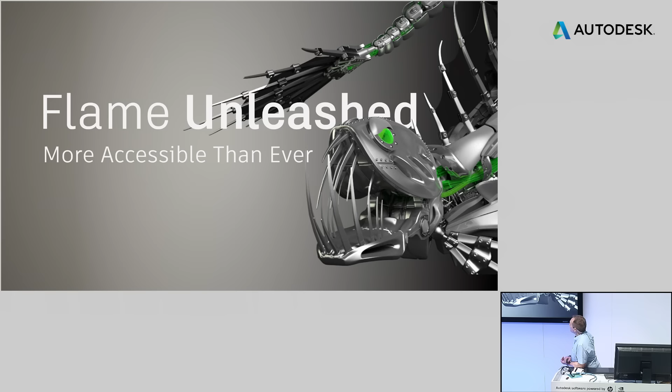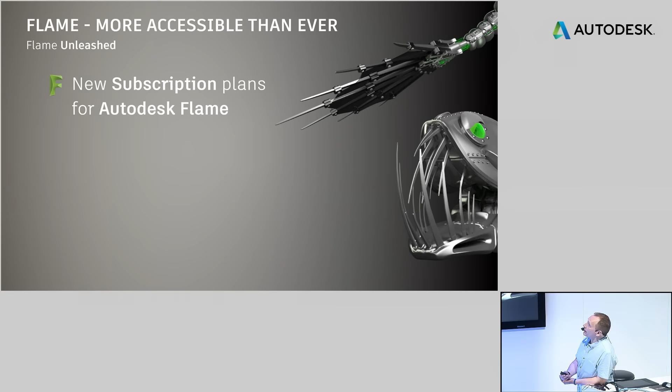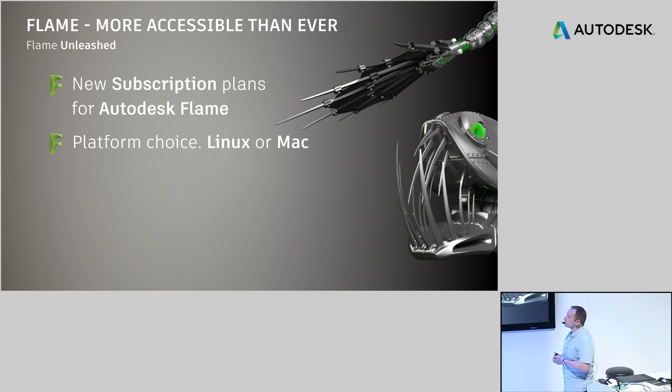First, I think we should talk about Flame Unleashed and what that actually means for accessibility. Last year, around October, we made a drastic change to the way that we sell and provide you with our software. The reason for this was we just want to make it more accessible for people to get their hands on it. This covers the entire Flame family - Flame, Assist, Flare, and Lustre. Essentially what we're doing is giving you different options on how to obtain this more readily, more freely. So new subscription plans for all of our Flame products, and platform choice - you can run the entire Flame family on either a Linux or a Mac platform, which is really good. Flare and Flame Assist for everyone.

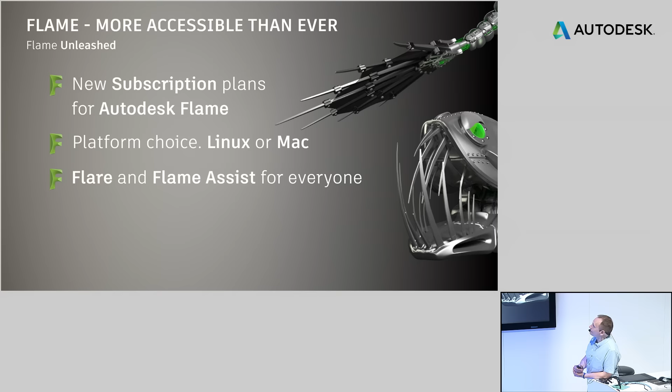What that means is, remember before the change, we were selling Flame on a hardware system, and you had to have a Flame to get access to these other two great bits of software. We're just unlocking that now - anybody can get any piece of software regardless of what they own. The entire Flame family is now available as software only, and that's quite an important thing.

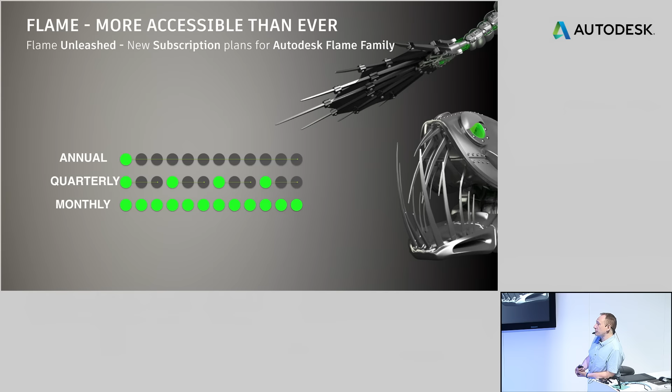Let's start with the subscription plans. We've got annual, of course, and we've got quarterly and monthly, giving people more options as to how they want to potentially deploy the software, scaling up and down as projects grow. You're always going to get facilities that want a Flame permanently, but there are times when you have to grow or shrink depending on the projects you get in, and the quarterly and monthly plans just give you a bit more flexibility. It's also really good for freelancers to get their hands on those products, do a particular job, and keep their costs really low.

And once again, the choice of a Linux or Mac platform - this really depends on how your facility is set up. Big established facilities are probably going to favor Linux; it's more extensible and flexible in a pipeline for people to do stuff with. But for accessibility, we want people to be able to get hold of the software, and the Mac is a great choice - just go into an Apple store, grab a Mac, run your software. It's not about preferring one over the other; a lot of our customers have large pipelines, and the Linux platform is very scalable and pipelinable. But there's also portability - people take these on set, or work from home, or rock into town one day, bring their system with them, do some work or pick up work for a client, then go home again. It's really good.

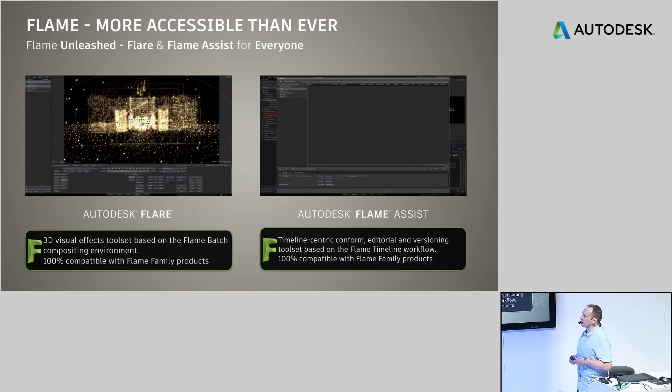So, Flare and Flame Assist for everyone - it's probably a good idea to talk about the difference between these two products. Think of Flame as having everything, all these amazing tools and incredible capabilities to do all your finishing work, and Flare and Flame Assist as two parts of the software that have been pulled out so that juniors or assistants can do some of the work and then feed that back into the Flame system.

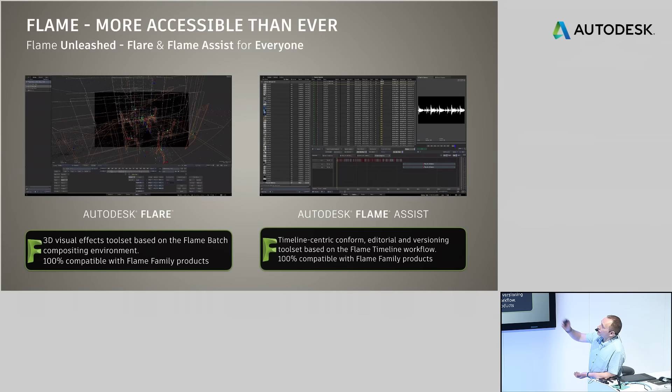Flare is the procedural compositing area of Flame, node-based, allows you to do a lot of heavy lifting on individual shots. Flame Assist is fantastic for conforming, editing, versioning, or even lighter jobs. These two options are really good for freelancers. If a freelancer picks up mainly shot-based work, Flare's a good thing. If they're doing more end-to-end deliveries, maybe something like Flame Assist is a good option.

Software only, so as we said, the option of running this on either a Linux platform or a Mac platform. This is also good for our resellers and partners. They now have the ability to spec out machines according to our specifications, or even if you feel a bit more daring, build your own. Many more options - that's the point of all this. More options than you can shake an option stick at.

So, Flame on OS X - this is the really big thing. First time you're able to run Flame on a Mac platform on OS X. And literally, Flame is everything - all the creative tools, all the editorial tools, absolutely everything, including the world-renowned desktop way of organizing it. We've got some examples here on the booth, go have a look on the pods. It's a great experience, a great piece of software to work on. Having it available on that platform really unlocks things for us.

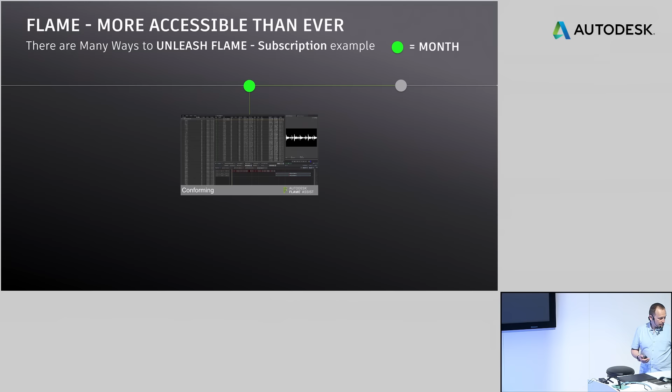This is a great example of, potentially if you're in a post house, small or mid-tier, how you could take advantage of those subscription offerings to better manage your profits, your expenditure, and also the people coming into work. It's a great use case of how you might walk through a project using the new subscription model. You may start out with a single license, conforming the job, working out the details of the storytelling.

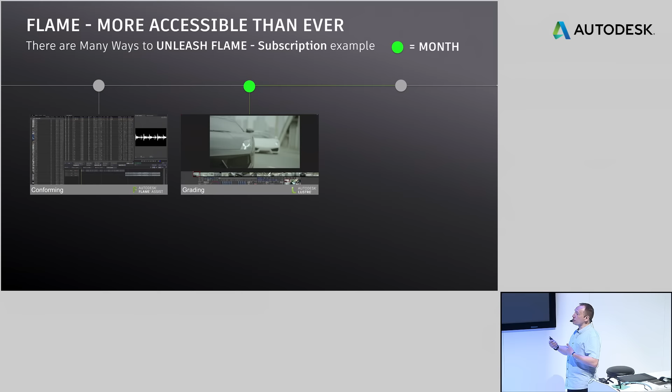From there, as your project progresses, you can grow the licenses you need to complete those different phases of the job, which is quite nice. You may always have one or two annual subscriptions, but as you go to different stages, you may just need a piece of software for a month or maybe a quarter to do some specific tasks.

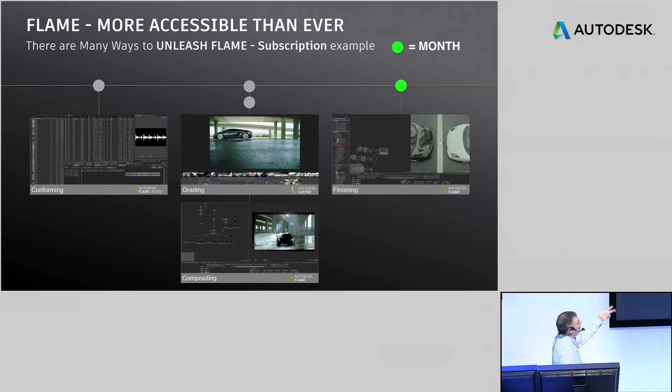Or the deadline is coming, and you may want to say, okay, we need to bring on more work, more people. You can have two people working in parallel, grading, compositing, and then move to your finishing stage. Of course, round things off with maybe a Flame license just to pull everything together, do those last-minute tweaks, because you've got the whole tool set of everything before it. It's a great way of doing it, and then you're delivering and versioning off afterwards, so it's just a more sensible way.

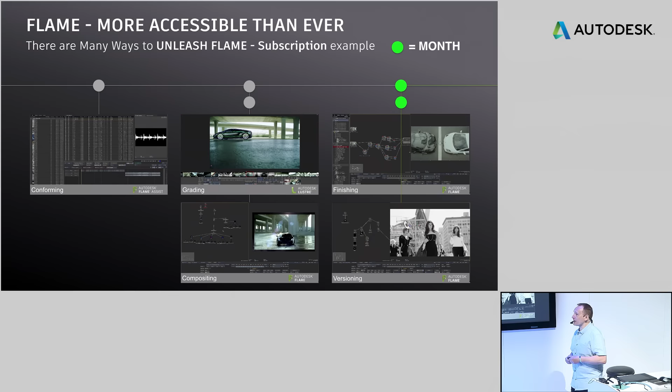I come from London, we've got a lot of post houses in the small to medium size that are taking advantage of exactly this offering, and it's working really well for them.

There's also a great commercial post example from Envy in London that Joe's going to show a bit later, showing off a lot of the new features in Flame - we call it the What's New demo of Flame. And then we have a very cool broadcast example from Reveal 42 in New York for a job they did for Showtime using Flame and Maya together, with some exciting new motion graphics tools in Maya highlighted in that presentation. But the point here is Flame is used in a multitude of ways in a lot of different markets.

Yeah, and this is just the tip of the iceberg. Obviously there's way more use cases, but these are the ones we thought we'd highlight this week. And we've got some specialty ones where we've got guest speakers today talking exactly how they use those products in those particular pipelines as well.

So we always like to have a little recap. It's always healthy to look a little bit backwards to see what we've done over the years. And all of this has only really been possible by the decision to do drastic things, given it's a 20-year-old piece of software. We knew we had to make changes to make all of this possible.

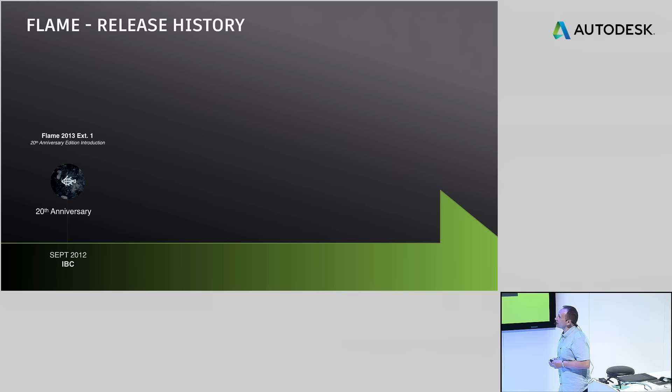Back at IBC in 2012, we released the 20th anniversary edition. Then through the years, through the releases, we've incrementally put all these bits and pieces in, all this pipeline connectivity, all these tools, bringing us right up to where we are today.

With Flame 2017, with our new camera effects and physically based rendering inside of Action, which joins a lot of the dots when we started to introduce things like Matchbox, then Lightbox, and now we've got camera effects, the connected conform, the connected color workflow we've got. So it's nicely progressed through from that initial release through to where we are today.

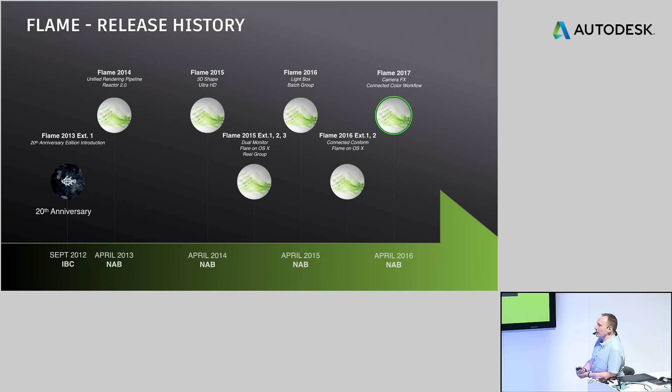At this point, the entire software was rewritten to take advantage of GPU acceleration. Exactly. So at that point, that opened the door to a lot of other really cool things we could bring into the software because the foundational work had been done. And it lays the basis now for hopefully another 20 years of the software as well. This is a good thing.

Obviously we've got a new release, so these are the big ticket items, the ones we're shouting about at this particular show. Should we alternate, Bill? We could do that. Oh, you can go first.

Okay, so connected conform, Stewie mentioned this before. If you've been a Flame artist for a while, you may have had situations, especially dealing with multiple versions - you always are going to produce a 60-second version, a 30-second version, maybe even a 15-second version. There's a lot of times when you're using the same content, and rather than manually dragging and dropping iterations into other versions, this is a really amazing way of holding all your versions open and live at the same time, manipulating something - perhaps an effect or a color correction in one shot - and then distributing it automatically, connected, to the other places.

Great tool for people doing commercials, versioning, language versions, that kind of thing. Connected color workflow, we're going to look at that a little bit later on, but pretty much the same premise as what we're doing with conforming. A very unique way of linking two products together to give a unique interaction, to be quite honest. Now you've got the full grading set of Lustre, and you've also got the full gamut of creative tools inside of Flame, and you can run the applications at the same time. It's really quite groundbreaking.

Post-processing, Bill? Yeah, so Action is really the brain of the system. You're going to see Stewie using that a lot in the next presentation. But what happens in there is a lot of heavy lifting, a lot of heavy compositing. There's been some really groundbreaking new tools, Lightbox, Matchbox, you'll see a bit of that. But what we really see here is a lot of the power tools used for doing all the sweetening and finishing. Exactly, well, it's the bit that makes Flame, isn't it?

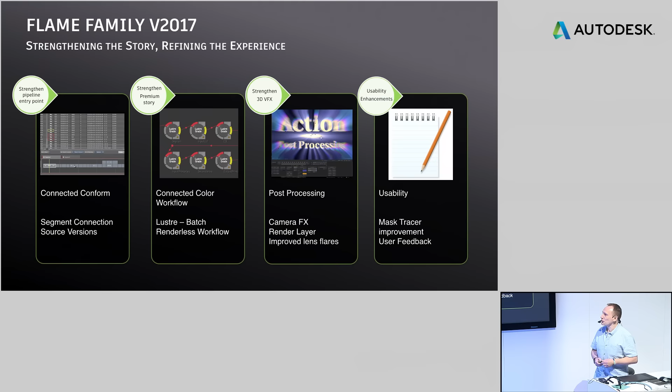Exactly, in some respects. And lastly, usability. Every year it's no good just doing features and features and features - we've got to make the software usable, since people are using this day in, day out for their living. So usability is always a big bucket list of stuff that people say 'can you fix that, could you make this better.' And every release we've been mopping up on those small, annoying things. There's always a list.

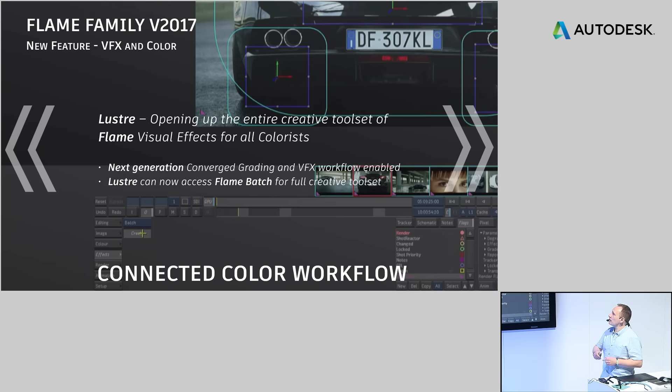So a quick recap - Connected Conform, once again, quite a unique way of working with your editorial across multiple sequences. Connected color workflow - won't say too much about that because we're going to be looking at it straight after this.

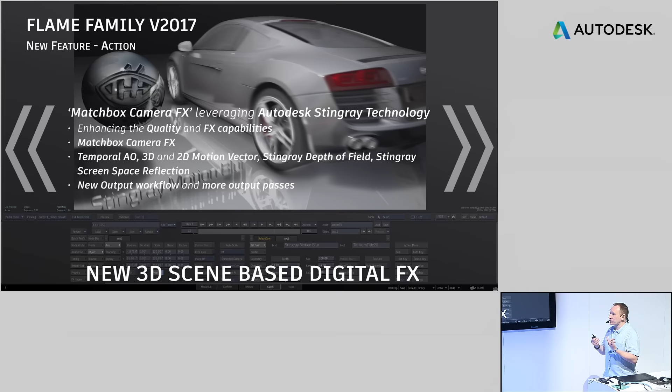3D scene-based digital effects, this is Matchbox inside of Action. This is camera effects, giving you a lot more access to creative tools. It's taking advantage of some Stingray technology we've got, game engine driven, so it's super fast. This one's worth dwelling on a little bit more.

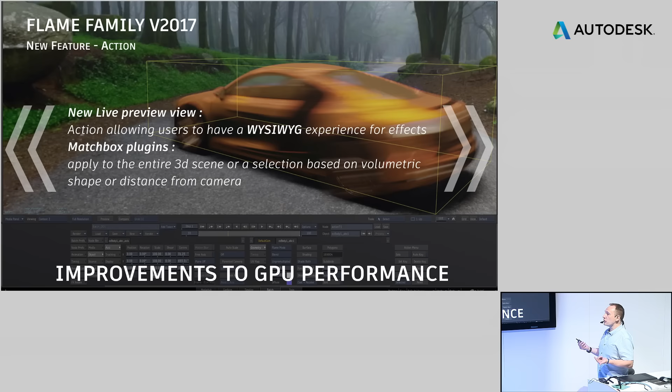We're talking about the changes to the render inside of Action. When we start hooking up these different shaders to Action, changing the behavior of how Action starts to render, and the sheer quality and performance of what you're getting in the viewport with our live preview now. What you see is what you get rendering, real-time motion blur, real-time depth of field, all made possible from that technology we've acquired from Stingray. It's really good.

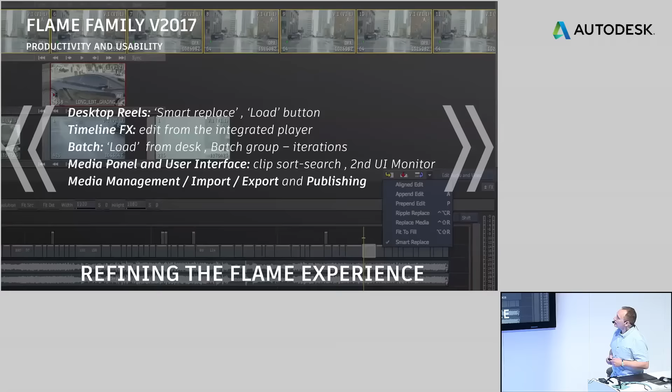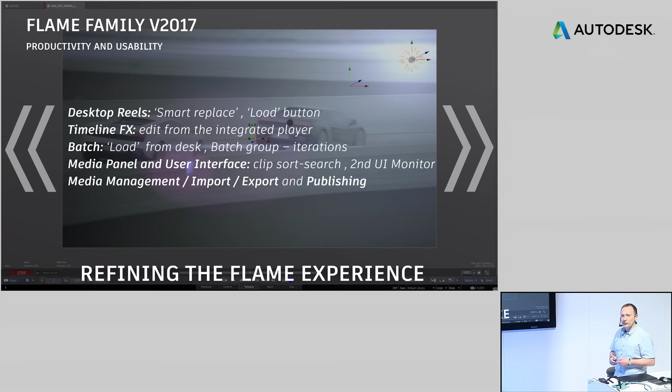And once again, it's all kind of pointless unless the usability around everything else makes the system work. Little tweaks, the desktop unique to Flame, the reel system of organizing your media, the way we can start dealing with media, the archiving system. All these things we take for granted because we've been using it for so long, but for new users it's quite an eye-opener. It's certainly a compelling thing to look at with Flame. The navigation is very important.

Talking of connecting things, because we've talked about connecting things quite a lot, we acquired a little company called Shotgun a few years ago. We thought Shotgun was a really good way to start hooking together not only our own products, but products for other vendors as well, because everybody uses different things.

Anyway, so Shotgun is an asset tracking system, and it works really well in facilities, sort of gluing things together. It's a way, well, actually, we're just going to have a look.

These are all my available applications. As soon as you start launching these applications through Shotgun, Shotgun is aware of what you're doing with those applications, and the media and assets that you start to generate.

So the first stage here, we're going to use our connected conform. We're going to trundle off and find some EDLs to conform. Bring those in, have a look at this, and go find the media that matches those, all sitting together.

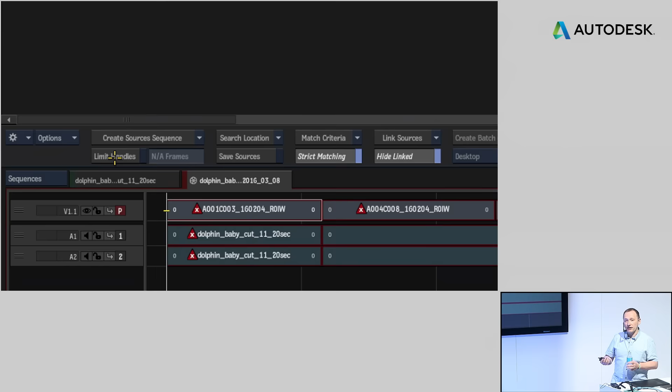We're going to use a conforming module now based on match criteria to associate that media with all of those events. Once we've got all of our media linked, we're going to go through a couple of processes to let Shotgun know that we've been doing some stuff inside of Flame.

So you can see that all these segments have the original source timecodes and tape names. What we're going to go through is standardizing the naming convention using something called rename shot. We've got a whole bunch of tokens we can use. In this case, we're going to use a default background index. You can see all the shots have now been sequentially numbered 1, 2, 3, 4, 5. You can call them whatever you want.

From there, the next thing we want to do is let Shotgun know a couple of things. First, we're going to publish out the entire edit for review and approval, to make sure the editorial is good before we start doing some stuff. After that, we're going to take each of those individual shots and publish those out as physical media to our local storage, and also update the cloud project to let everybody know what we've been doing.

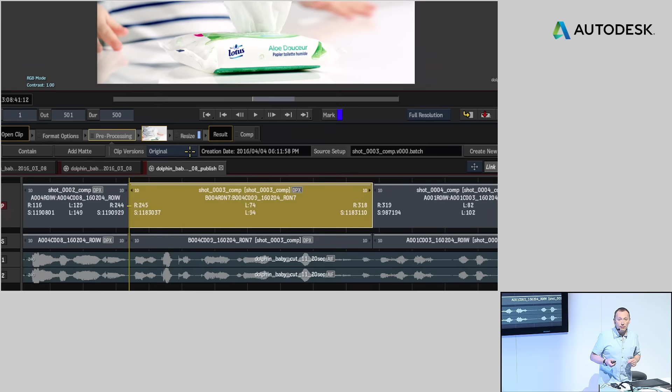Once we've got this, we get what we call a return publish. We've still got the original edit underneath, but the new layer on top is essentially Shotgun-aware now. So Shotgun knows that we've done something, but the most important thing is that those segments can now contain multiple versions of the work we do.

So back out in our pipeline, this is kind of what's happened. We've done the conform, published some stuff out. Flame has pushed the actual physical media back to your local storage in your facility, but it's also updated the Shotgun project. So what we can do is open this up in various ways in the Shotgun project. We're going to use Firefox to have a quick look in the web browser, and see how that exactly looks on the web page.

It's very much a little bit the same sort of concept as Facebook. We've got a project, we've got things we're going to follow, we can see some people working on this, and we can see some shots and some assets.

From an administrator's point of view, I can then start to deal out tasks to other people that I'd like them to do. So here's some shots, and these are the people associated with this particular project. What I want to do now is start the ball rolling by saying I need somebody else to make me up a new squishy pack in Maya, and then when that squishy pack has been made up, I need somebody to start adding that into the comp.

In our Media Hub, this is a really great way where we can review anything that has been done within Shotgun. This is what our publish to review looks like - it's a whole timeline, we've got annotation tools, you can leave notes, it's a real-time player. This is sitting up in the cloud, it's the stuff we published out as a QuickTime. What's nice about this is anybody associated with this job can start leaving comments, which then get populated to anybody else associated with this particular job, shot, or project.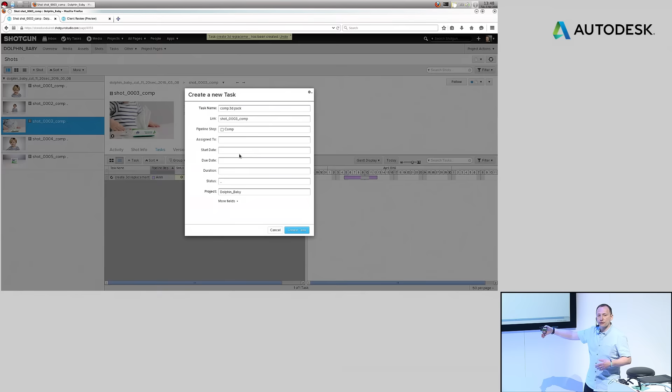When you start doing this, you start populating this production Gantt chart. So once again, from a producer, director, or facilities manager's point of view, they can very easily start coordinating multiple people to get things done. So we've got two tasks there, one for Morgan, one for Joe. Joe can't start his until Morgan's done his little thing on Maya.

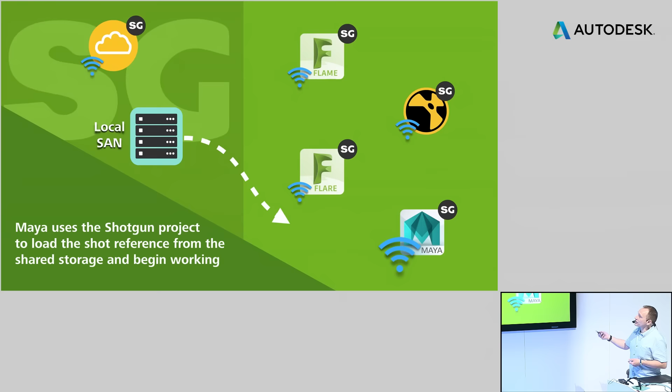So what's going to happen now is that after we've reviewed all that, and Morgan has got his notification, he is going to now look at his login and see what he has to do, particularly for this day. And once again, we're going to use our local media storage, and that's going to provide the reference for what he has to do. And Morgan is now going to come and start looking at his page.

There's Morgan. So you can see here that he's going to get a little note in his inbox. It's kind of like an email thing saying, can you sort some things out in this task? And he goes, yeah, sure, I'll get that notification back. He says that this task is now in progress, and he's going to look at how long that's going to take him to do.

Here's a particular shot he needs to do. He can see this. He's going to update his status now - it's in progress. And he's going to now launch this particular shot through, once again, the Shotgun desktop loader. He's going to launch Maya.

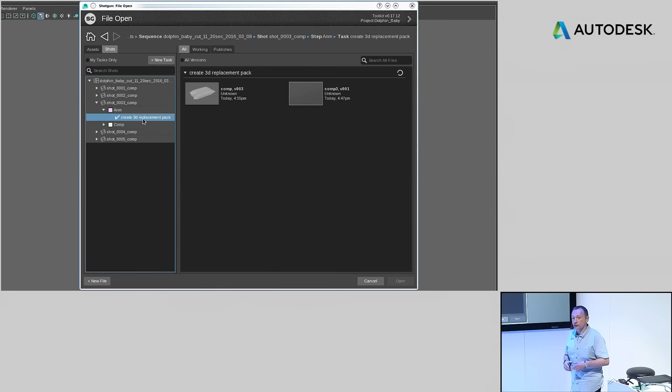Now, when he goes in, there's a dedicated panel inside of these applications when you're running through Shotgun, which is like a Shotgun menu. So you're a loader, a publisher, an importer. And what he's doing here is he's using that Shotgun panel to load in assets and objects into Maya without even having to go look for them, okay?

Because once again, it's tracking where these things are. So he's brought in his FBX using the Shotgun loader. He's doing a little bit of sculpting work inside of here using some of the new Maya sculpt tools that we've got here. All very nice.

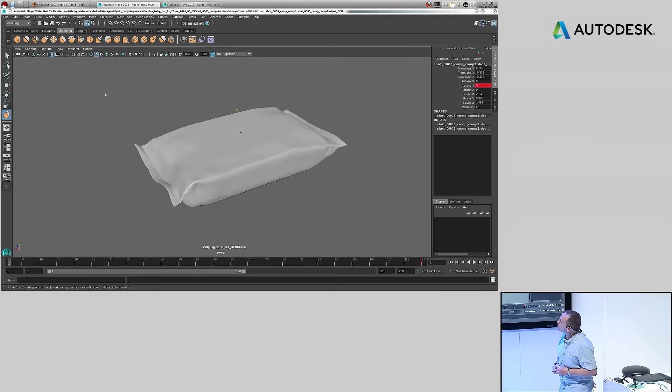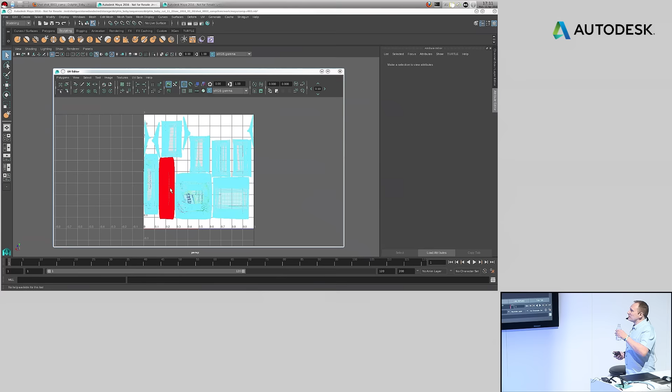And the next thing he's going to have to do from there, he's going to have to texture it for me, okay? I've asked him to make a new pack, new texture, and then when that's done, kind of notify the next person in that stage, that pipeline, that they are ready to start. So he's doing all the typical sort of 3D things. He's got to sort out some UVs here because some of the stuff is kind of flipped - go to UV editor, just wiggle some things around, just do some scaling.

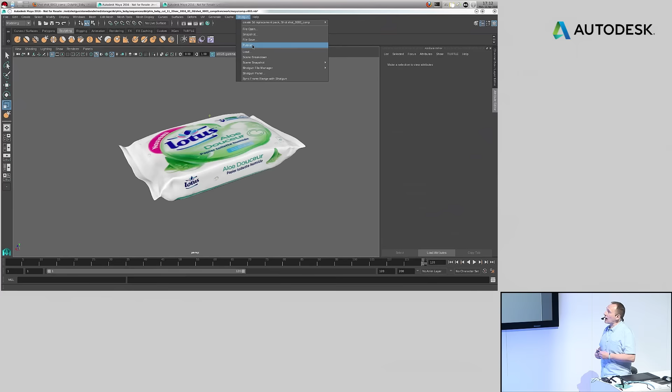Once that's done, he needs to then get this back out into the pipeline and make everybody aware that some stuff has happened. So what we have here, once again, our Shotgun menu - we can now take those assets, those objects that we've done, and publish them physically back into the pipeline, back into the storage, but also update the other people associated with this job or this task that he's completed his part. He does a little snapshot, says this is all good, new texture, tweak the model, publish this out. So now Shotgun is kind of controlling where this is sitting in the directory structure, so you don't have to go and look for it.

Once again, you can see on his landing page there's been a bit of an update. He's going to go to his task and say that mine is done, that's final. And he's saying to Joe, you're ready to go.

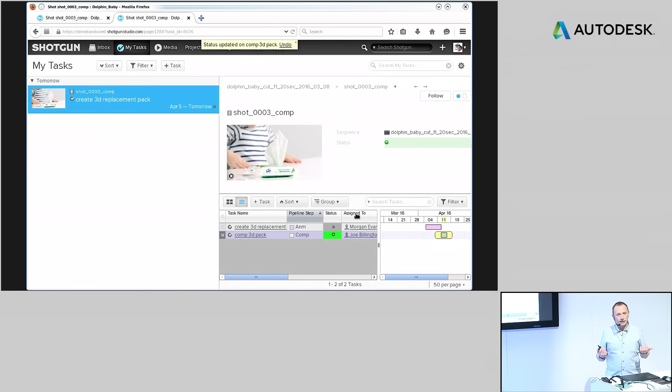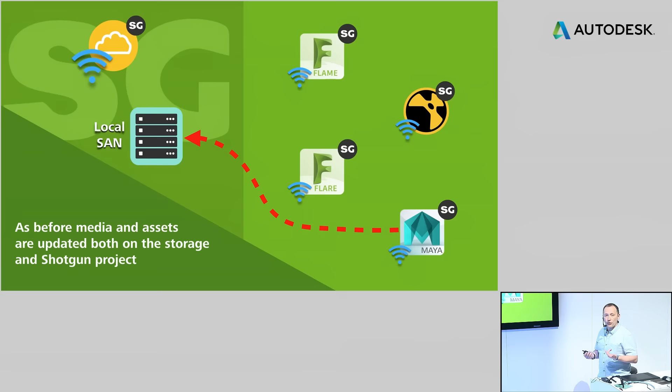The pack has all been done. Once again, nobody's emailed or picked up the phone or put a little post-it note on the monitor. This has all been handled by this pipeline tool. So, as before, Maya is going to throw this out to the storage, and it's going to update all the Shotgun projects.

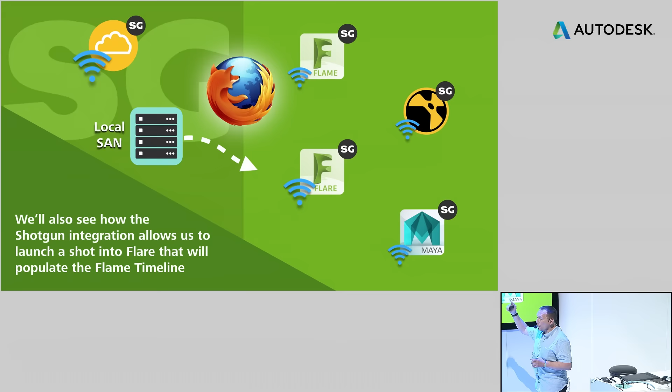Everybody's going to get a notification. And then the next thing from there, we're going to see Joe log into his user, see what task he's got associated with. But also what we're going to do is see how, when he's completed his task, all this updates in my Flame timeline automatically, which is kind of the real killer feature.

So this is my colleague Joe. He's going to be logging in, checking his landing page for this particular project. So he's up here, this is him. You can have artists associated with multiple projects at once, it's not just the one thing. He's going to go in here.

He's going to see that I've sent some stuff off for approval. Morgan's finished some 3D packs, so he's going to get notification on that as well. He's then going to pop up to his inbox. This is the task that I set him. He's going to use that to go to his task and look at some of the information about it, when it's got to be accomplished by, other bits and pieces, who assigned it to him.

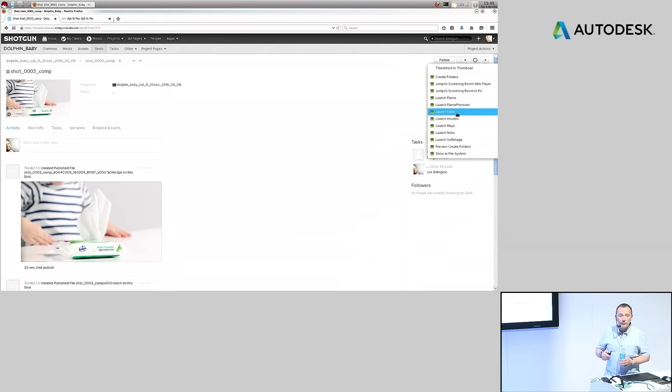And this time he's going to launch this shot directly into Flare from the web browser. So this is a second way that we can actually launch this application. What's nice is that when that happens, it's a setup that has already been pre-configured by Shotgun.

The media is in there. There's a write file that's going to write it back to the correct place in the directory structure and automatically increment the version as it does so. So all Joe really has to worry about is his task, which is going to be compositing.

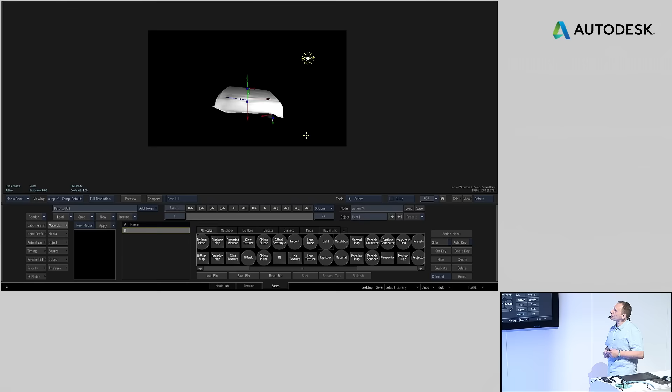So he's going to go and find that FBX in the file system that got published out by Maya. You can see here it's just a bit of a clay model. He's going to throw a light on it. Eventually in this we're going to use some of our new PBR tools to relight and make this pack look a little bit more realistic.

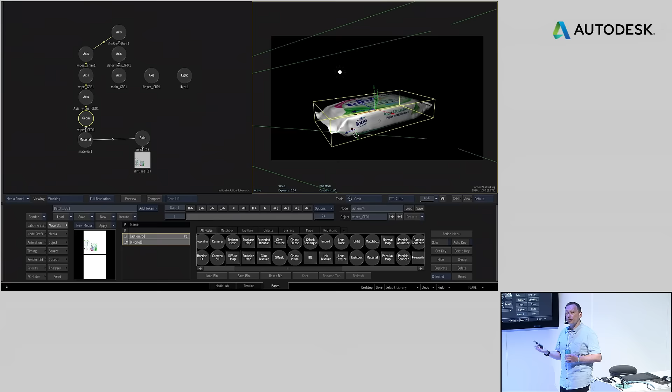He's going to go and find the texture that Morgan published out, and associate that texture with that particular pack. So what we get very quickly is a 3D asset with a texture that we now have in our compositing environment, and it all looks pretty good. Now, of course, what we want to do is actually composite that against the original. We're going to do a pack replacement in this particular case.

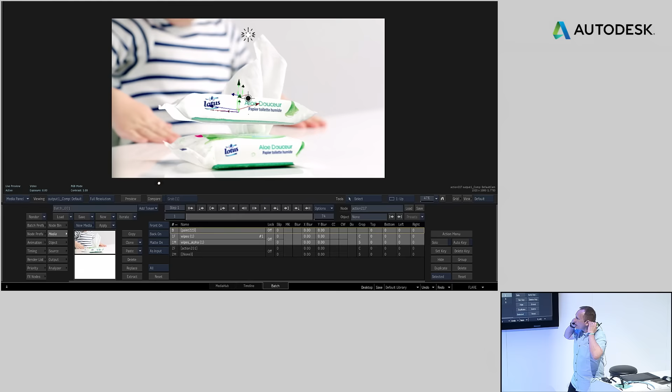So we're going to move on one step here. We did something that's kind of pre-built, and using all the new tools and camera effects, we get a really nice, realistic look. This is going to save you a load of time if you're used to rendering things out in 3D with motion blur and that kind of thing - it takes a long time. This is a far more efficient way of dealing with this stuff.

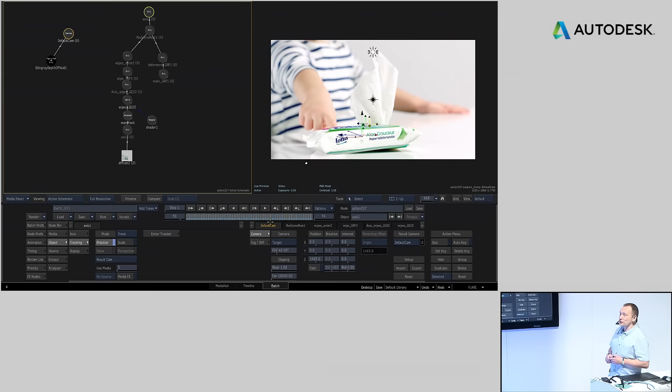We're going to match a pack in - really simple task for Flame. We're just going to do a quick 2-point track for position and rotation. And you're going to see very quickly when we hook that up, we have a squidgy pack that kind of matches the original squidgy pack, but with some different textures on it.

Last thing Joe has to do is then write that back out into the file system again. He doesn't have to change anything here, he literally just has to hit render. He's going to add a little note to this, and there's going to be a QuickTime uploaded to the Shotgun project as well. Everybody gets informed about what has happened in that pipeline since Joe's been working on it.

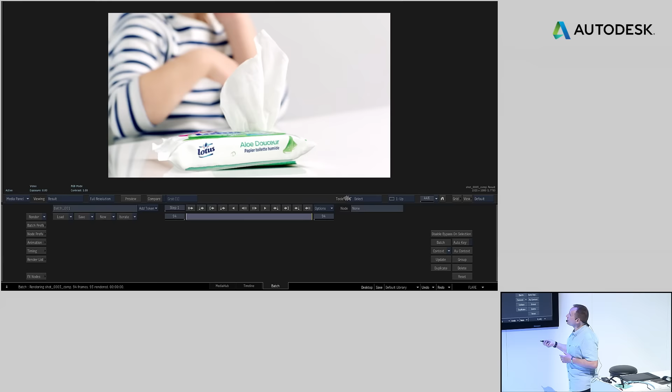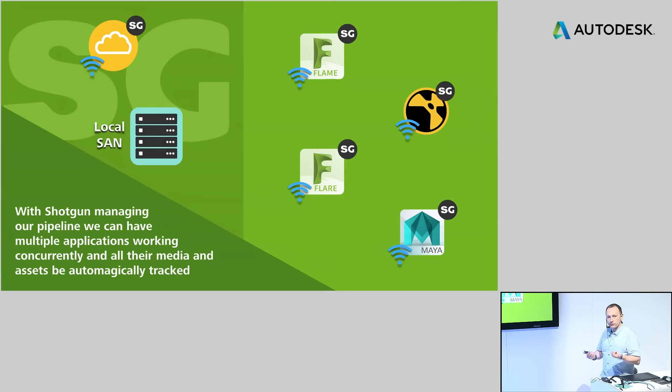So the final stage of this is, how does this work in practice? The nice thing about this is that we've been showing it very singularly, but you've got to imagine you can have a huge facility and everybody can be doing something at any one time. And Shotgun is managing those assets, tracking things, keeping people informed. If you were to do this as a producer on your own, emailing people, looking at quicktimes, you'd be in a right state. This really helps.

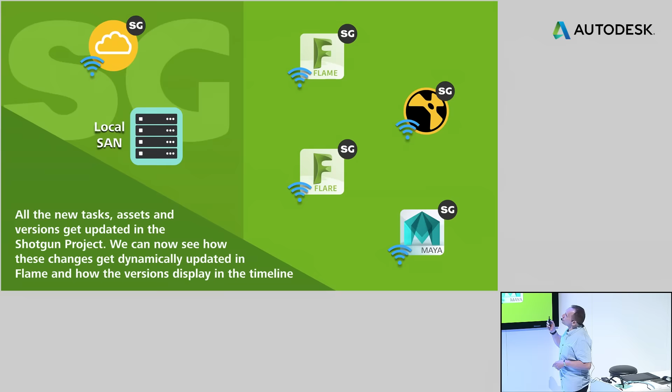So we're going to loop all the way back round to Flame now. All these things that have been done, I've still been sitting in Flame, doing some compositing, some more editorial. But what's really nice is that when I go back into Flame, we now have a panel that sits inside the application that can show me all the things that have been going on, without me going to a web browser. It's like a quick look panel. You can see Joe's done some stuff and some notifications, all the notes, versions, tasks and info. It's like a quick peek version of the big web browser.

So I can see that some stuff has changed. He's done the pack, it's all good for me to go. And looking at my timeline, we've got a visual indication that something has happened on that shot, a white border. We've also got a change up here as well. You can see we've got the original version, and now version 1, which Joe has done. That's automatically been put into the timeline for me.

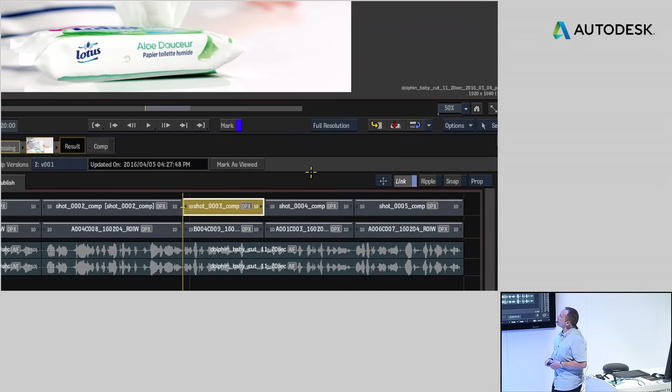Now, when I'm happy with that, I can just mark that as being viewed, and then I can go on and further propagate that process inside of Flame by creating another new version, which will automatically increment inside the Shotgun pipeline. So here I'm going to do something very basic.

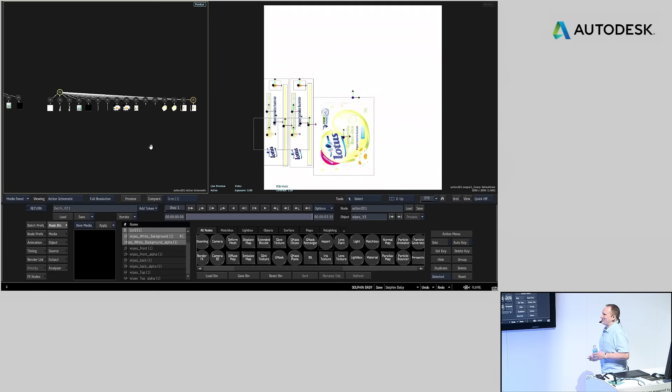I'm going to go and find another texture. There was a version 2 of the texture that we had, another Photoshop file, significantly different from the first one. You can see it's a bit yellow, different flowers, a different flavor of moist tissue wipes.

Just by changing the texture, that ripples through the setup that's already been built. The only thing I have to do is hit the render button to return that back out to the Shotgun pipeline and update my timeline that's being held in Flame. You can see this has been automatically incremented to version number 2.

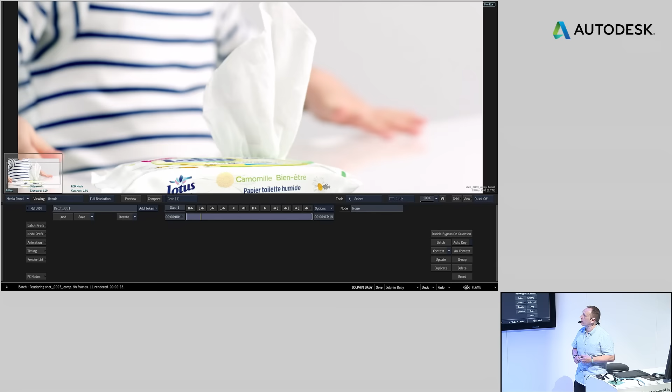Once again, I'm going to let everybody know that I've actually done something. This will get populated out to the Shotgun network, to all the people associated with this. And what I'll get back in the Flame timeline is a segment that has multiple versions associated with it.

I can mark that up as viewed again because I know I've just done this. And in my versions, you can see I've got version 2, version 1, and the original version. So it's a really elegant way of coordinating multiple applications and multiple people on a job.

We're going to look at the final playout for this particular piece.